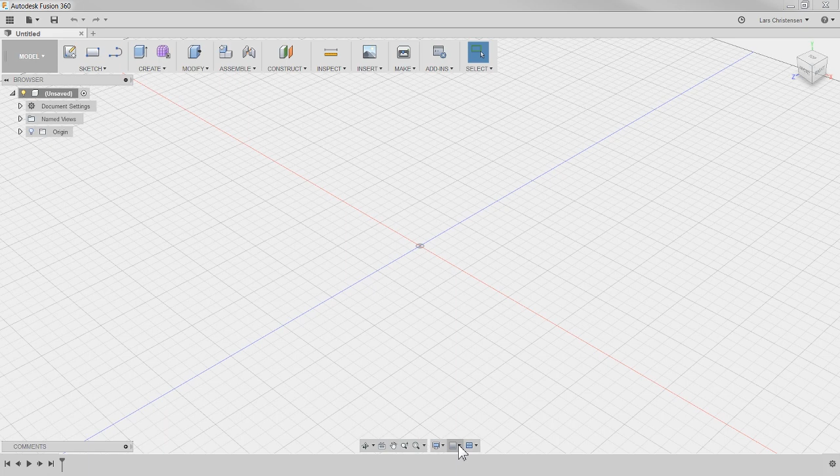And so I changed that. And then down here, you have this grid button. Click on that. I like to turn off layout grid down here. And snap to grid can be kind of nice to turn off too. I think that's one of the things that I normally do.

Mike is asking me where my beer is. Well, Mike, I brought it, and it's Canadian too. So that's good.

All right, so clean slate. Let's start out. So like I said before, whenever you're trying to model something up like this, I normally start with a simple thing, but then break the part into different sections in your mind, or at least this is what helps me. So we got a cylinder part here we're going to model up. Then we got this hexagon shape. You will notice on the side here that it has a little bit of a straight area, I hope you can see that, before it funnels into this. So that's where I'm going to start modeling up here.

Now I took some dimensions with my verniers that I put on a piece of paper. See, this is why I use CAD, because my drawing skills are horrendous. So let's start out with that cylinder, shall we? So I'm going to go up and create a new sketch, and you're gonna select some kind of a plane to do it on. And I'm just gonna select the bottom plane here, and I'm gonna hit C for circle, and open that up there, and we're gonna make that 48 millimeters in diameter. We're gonna do this in metric. So hit enter twice so we get that diameter.

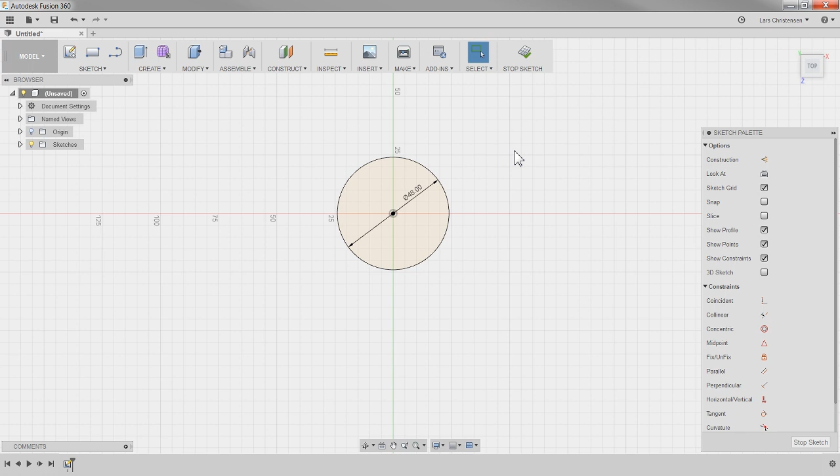So now we're going to extrude that, and I like to hit E for the press pull command. I'm just going to select that diameter, and we're just going to give it a length of 38. The 38 is the distance from the bottom and up till this inner section, that's going to be a radius here.

Now the next thing we've got to do, it seems like logically would be to work from this area up till the hexagon, but what we're going to do is use a loft function between the round cylinder up to the hexagon. So I'm actually going to jump on purpose. I'm going to jump up and start working on the top surface, this hexagon up here. So I measured this width here, and I know that the height here is 78. Now we have right now the 38 up to here.

So what I'm going to do is create, like if we click on the origin up here, we have the origin. I'm just going to rotate the model around, hold down Shift and middle mouse button. We have an origin where we have a plane that we sketched our first sketch on. Now I would like one that is 78 millimeters up here.

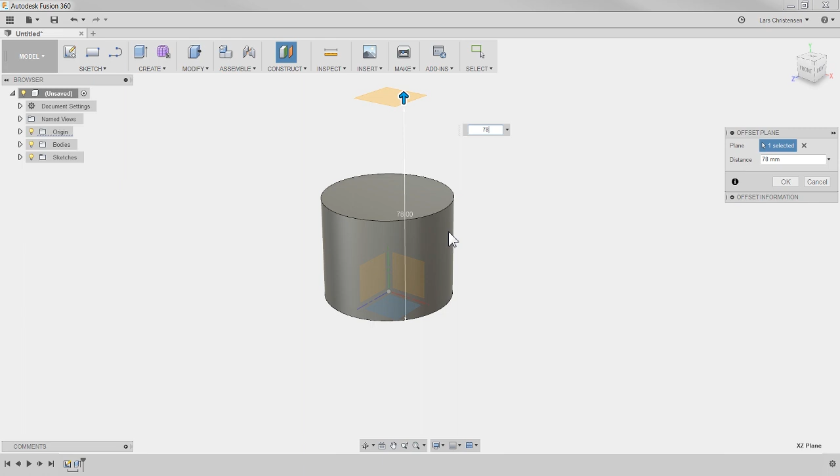So to do that, I am going to say offset plane. I'm going to select that plane, and every time I get an arrow like this, I just like to drag it in the direction I want, and I'm going to make that 78 millimeters up there and hit OK. So I created a new plane for me to sketch on.

So Mike asks a good question. Is it a good practice to start with a new component? Yes, if this was going to become an assembly with multiple parts, then it would be a good idea to start out with this as a new component. So what Mike is talking about is something called rule number 1 that somebody has named. Let me just open up a new design up here. So now we have a blank design.

So rule number 1 says before you do anything in here, you should right click up here and say create new component. Or you could also just click up here, create new component, and then start modeling within that component. The reason for this is to make sure that if you have an assembly with multiple components in it, the history that we are getting down here in the bottom is placed in the right order.

The way I did it here was I did not create a new component because this is not an assembly, this is just one part. But if I suddenly were going to make this into an assembly, the history in here would not go into it if I created any new components.

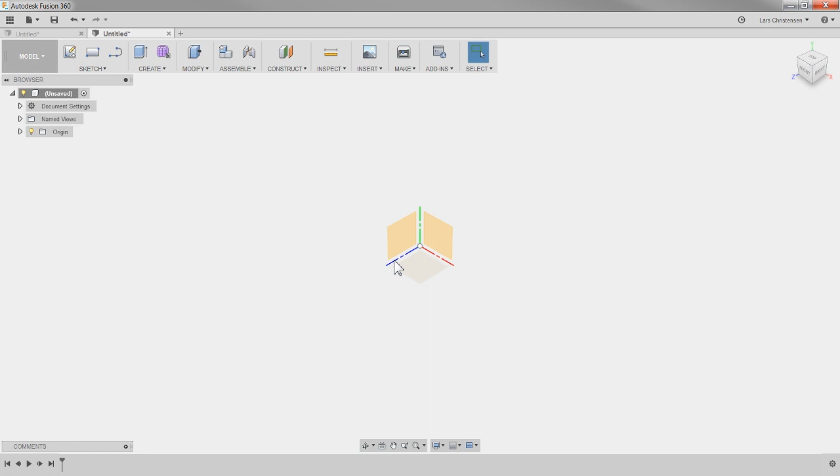But I will normally tell people, don't worry too much about that, because again, there is no rules for that, and you can actually change what is top up here. So if I had designed this on the wrong, not the wrong plane, because there's no rules. Let's just, in a new design here, create a new sketch. On this face, for example, hit C for circle.

And what did I make that one? I made that one 48, right? And then I extruded it out 38. So what we have in this design is the cylinder going this way, and in this design it's going this way if you compare to the top. Now if somebody came to you and was crying that they don't want it like this, they want it like this, first of all, tell them that there is no rules, okay?

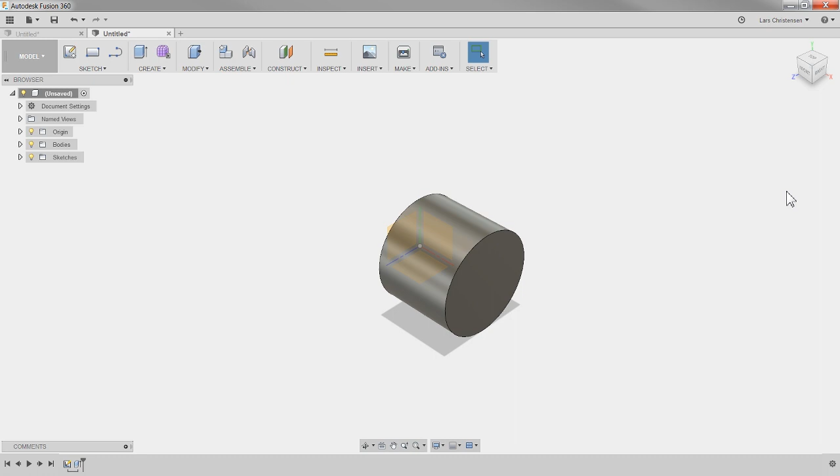But secondly, you can go over here and click on the right view, and it will make it normal to that right view. Then you can right click right here, and you can say set current view as top. So right now it's the right. You can kind of see that's the right. If I right click and I say set current view to top, notice what happens. Now it's the top. So I just flipped it around.

So now it is the same as the original design right here. So I hope that answers your question, Mike. And all we did up here was just change the camera angle. We didn't move the model around. Just think about like you're looking at your model with a video camera, and you just changed the perspective. So I hope that made sense.

All right, so what else have we got? We got Darren here. Good to see you, Darren.

So Matt asks, if I primarily design things to cut on a plasma table, should I do my design in sheet metal versus in model? That's a good question, Matt. Cheers on that. I think that, and this is just my personal opinion, if you don't have to flatten anything, if you're cutting parts on your plasma table that don't need any folding, then I would not go into sheet metal at all.

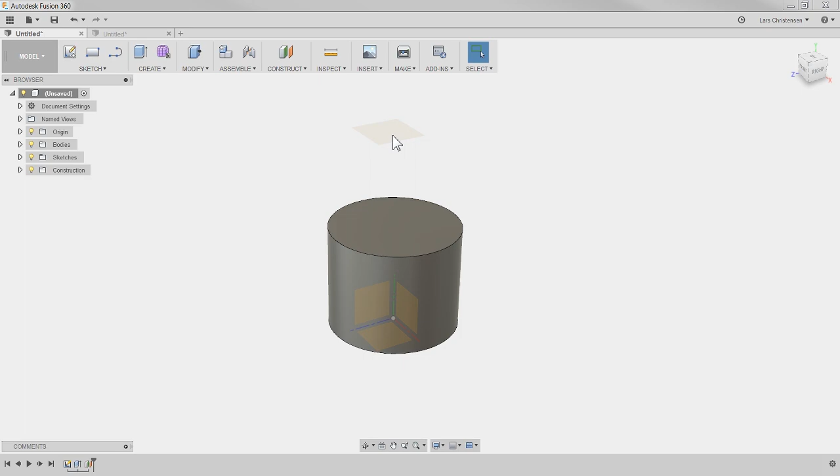So we are modeling this up now, and now we're ready to, so I made it 78 millimeters from here to here. This plane is here. So we're going to start sketching this hexagon up on this top level here. Now, in olden days, well, we got to open a sketch on it, no matter what. You might have had a tendency to start drawing with lines, kind of like the hexagon up here. You can do whatever floats your boat to make that hexagon like this, that's not pretty, then you could start using all the constraints over here, dimensions and all that stuff to actually make it a polygon or hexagon or whatever you want to call it.

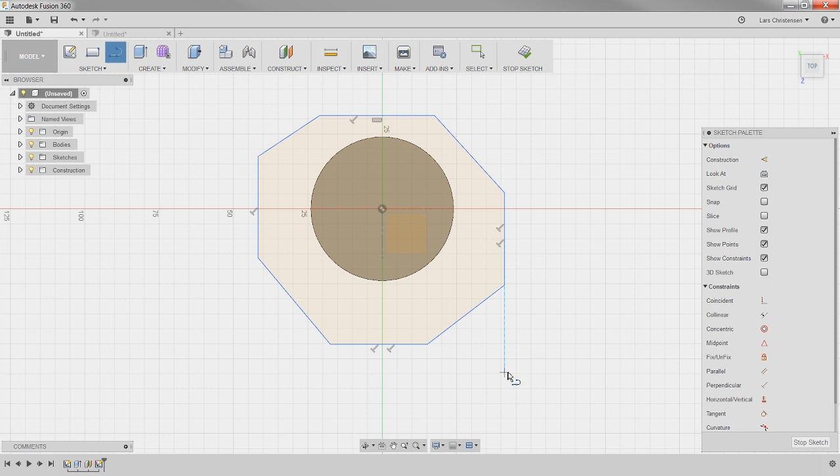I'm going to do Control Z. That is undo, Control Z. You can actually also hit right up here, undo, and you will undo back. And by the way, here's a really neat function. If you click on that little arrow next to it, look at how you can see the previous commands that you can undo back. And then you can, of course, also go forward.

So now, over here in the sketch drop-down, there is a Polygon tool that will do exactly what I was just trying to do. And that brings me up to, if you're new to Fusion, we get so eager to try to put something on the screen quick, and many times you miss how some of these tools work. And the reason I'm saying that is this Polygon, I used to use SolidWorks, and one time I had to do a polygon. I drew it up line by line, and somebody was like, why didn't you just use the Polygon tool? And I never knew that was hiding in there. So slowing down a little bit when you're working and maybe just exploring some of the different tools in here can really, really help you out. So not a $500 mistake, but it maybe looks a little silly.

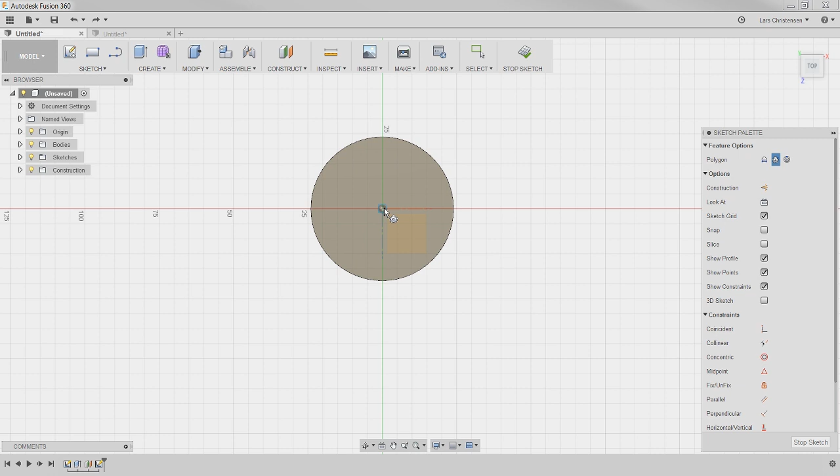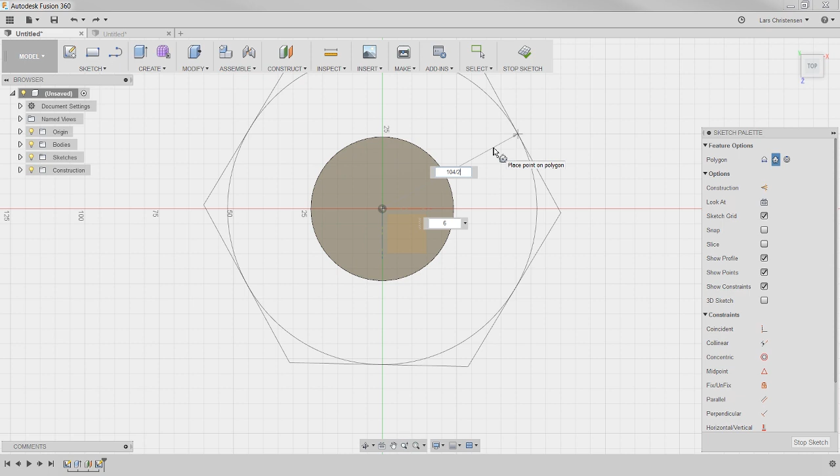Be aware that in here, in these dialog boxes, you see the 242.488, you can actually do math. So if I type in 104 and then divide it by 2, it will actually give me the right size. So I'm just going to hit enter here. So now 52, you probably could have done that math.

Now this one is blue. The $500 mistake that Mike is talking about is that we always need to fully define our sketches, and they need to turn black. So the easiest way, whenever you're looking at a sketch like this and you're thinking, why is it blue? Why is it not black? The easiest thing is to move your cursor over a corner, hold down your left mouse button and drag your mouse, and it will show you. So this shows me that I can't move it away from the center where I clicked the 52, but it will spin around. So I gotta work on that.

Now, one thing I could use is these constraints over here. I'm going to take this line here and make it horizontal. Click here, and you will see that now it gets this horizontal symbol. It is now fully defined in black. Now, just to show you what I just did, I'm going to rotate the view a little bit. I'm going to hold down Shift, middle mouse button, and move my mouse. So now you can see that hexagon or polygon, whatever you want to call it, sitting up here on the 78 millimeter plane.

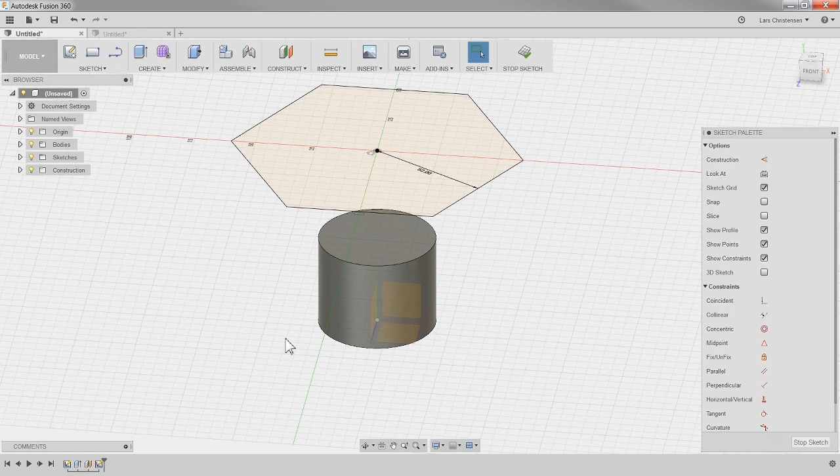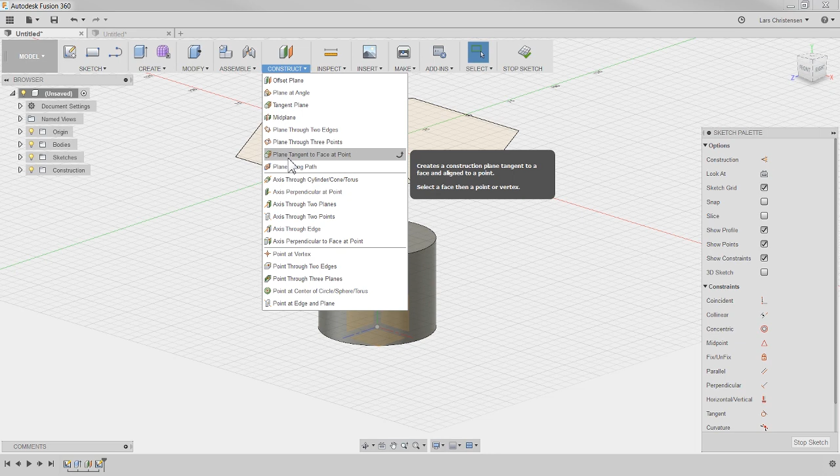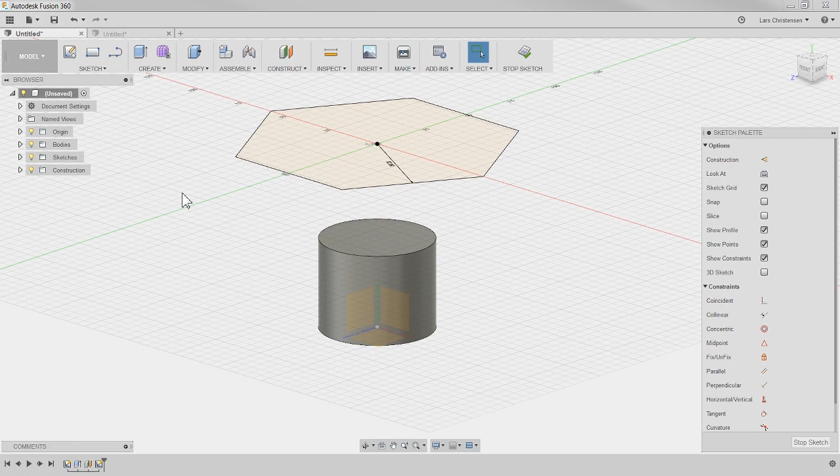And this is not uncommon when you're working inside of Fusion, that you will create a new plane, an offset plane, to sketch something else on. And now we're going to work our way down to connect the two. So I hope that makes sense. Like I said earlier, remember, you can only sketch on either a face or a plane. So if you don't have a face to sketch on, many times creating a plane, and you have all different kinds of options in here, will help you create somewhere you can sketch. That has happened to all of us, where you're getting stuck and you're not quite sure how to proceed. Many times it's just because you don't have the right plane. I have made a couple of videos using these different planes, so if you're looking for some feedback on that, let me know.

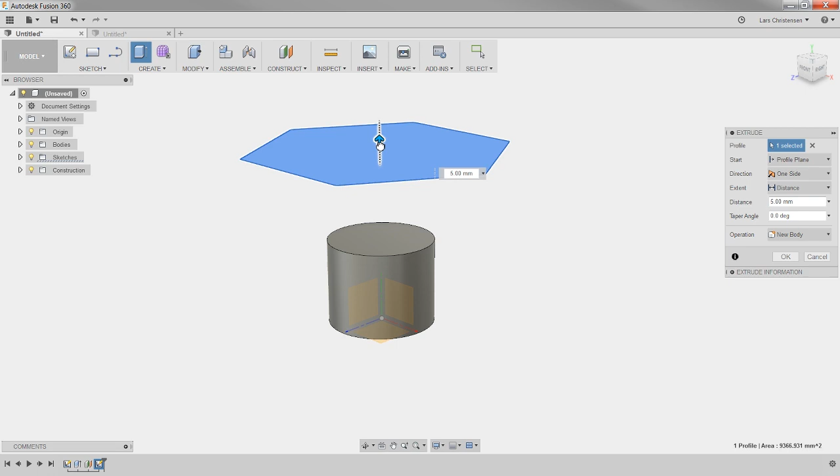Okay, so now we're ready to extrude this one. So we have created that sketch. Now I know that there's all kinds of radiuses and fillets on here. We're gonna work on those in a little bit. But I'm only gonna extrude this one out 10 millimeters, that little straight portion right there. So I'm gonna go over here and hit E, and then we can go either this way or this way. And this is why I like to drag, because as soon as I drag it down here, you will see that it shows we are minus. If I just typed in 10, it's actually going the wrong way. It's supposed to be minus 10 this way. And I'm just gonna hit OK.

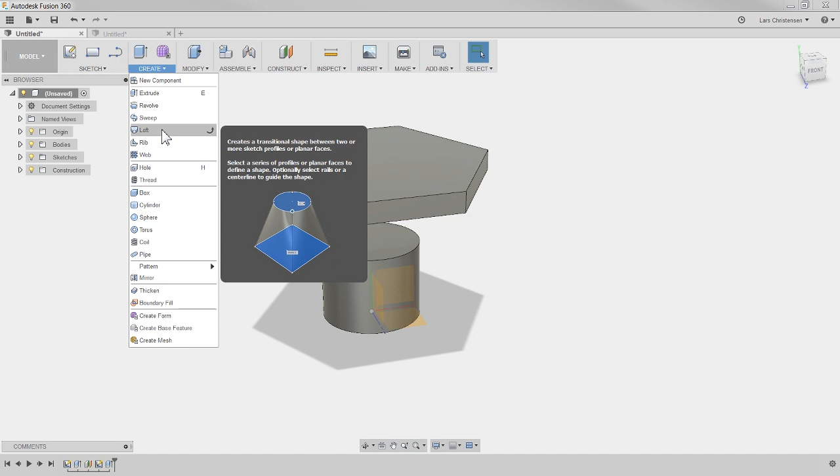Now something interesting has happened, and that is we've actually created what is called a multi-body by having two bodies in here. Some people would tell you that you are now working in an advanced environment. So we got this here. Now we have to make that transition between this face, from the polygon to that round face. And for that, we're going to use a command called a loft. Now, if you've ever seen me use the loft, I have always used two sketches, one in one end and one in the other end. But you actually don't need any sketches. It will also work between just faces, which is pretty awesome.

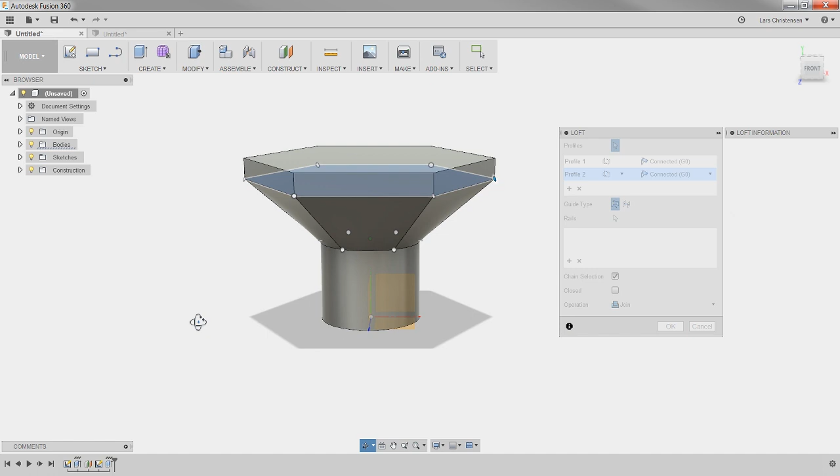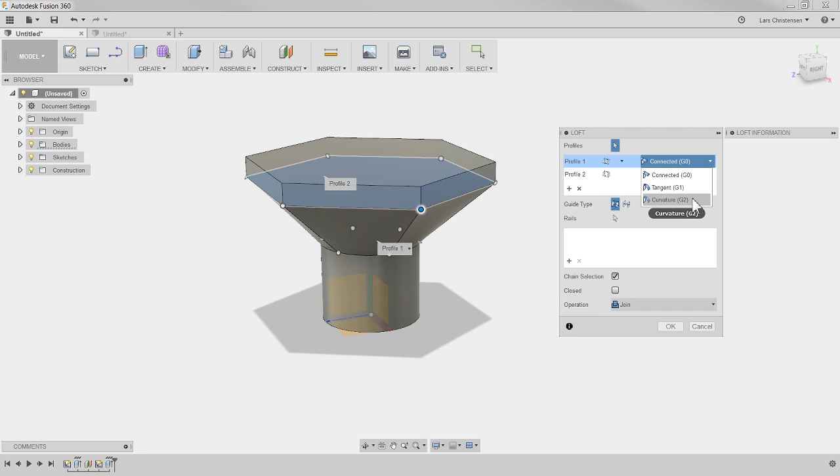So if I select our bottom face here, hold down Shift middle mouse button to scroll around and select this other face here, you will see that we get a nice transition between the round and the hexagon. Now you will see that it creates a point at each hexagon corner because it has to break down the geometry. Now be aware that there are a lot of great options over here that you can work with. I've made a live stream about this too, there's something called G0, G1, G2. It really means how it interacts. So let me go tangent, and you will see how we suddenly get a tangency between this cylinder and this cylinder. So just be aware there are some things you can tweak in here. But we're going to leave it straight out of the box. Click the two faces, leave it at G0 and hit OK.

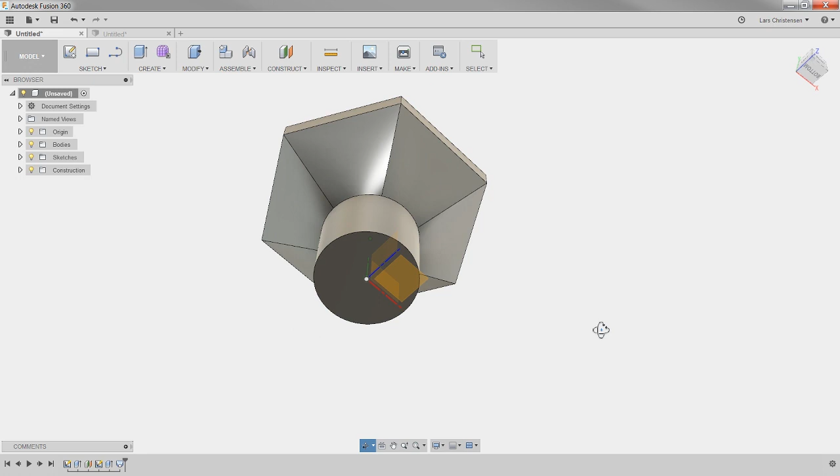And something that for many people seems a little like, how the heck would I ever do that?

But the Loft command in here is really, really nice. Last Wednesday, we talked about the Revolve command to make the screwdriver. So that was another one of these tools that does some magic. Okay, so we kind of got this created here. Now, I might be ready to concentrate a little bit on cutting out the material in the center.

So this is actually, I think, a pretty good tip if you're brand new to Fusion or to CAD in general: start out making all your solids, and then you can come back and do all your cutouts. Like we're gonna cut out the center of this one, and then in the end you could put all your fillets. However, I'm gonna show you a trick about that in a second. Okay, so

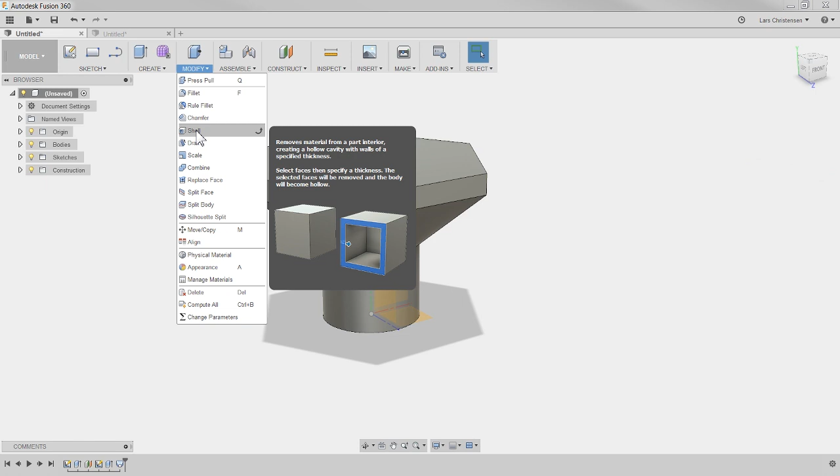now where we got to make a hole through this one, I'm going to introduce you to another command that is really nice. So you're getting two cool commands tonight, and that is the shell command right here. What the shell command does is that if you select a face, it will hollow everything out to a specific thickness. Let me show you. So if I click on shell and I click on this top face, it asks you for a thickness. I know I want this one 3 millimeters, so I'm going to type that in.

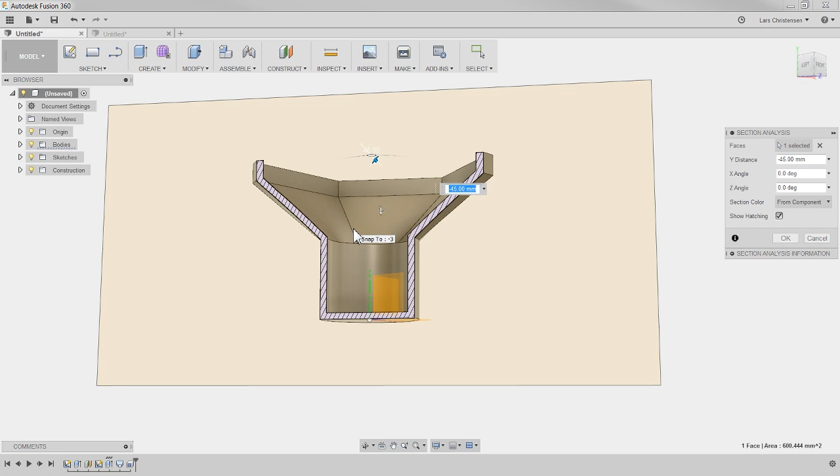And notice, shift middle mouse button, how it literally cut everything out and made a wall all the way through here that is 3 millimeters. Let me just hit OK for a second. I go up here to inspect a section analysis so you can see it a little bit better. If I cut through here, you will see that it creates a 3 millimeter thickness all the way around, and almost does what I want, because I actually also want the bottom to be gone.

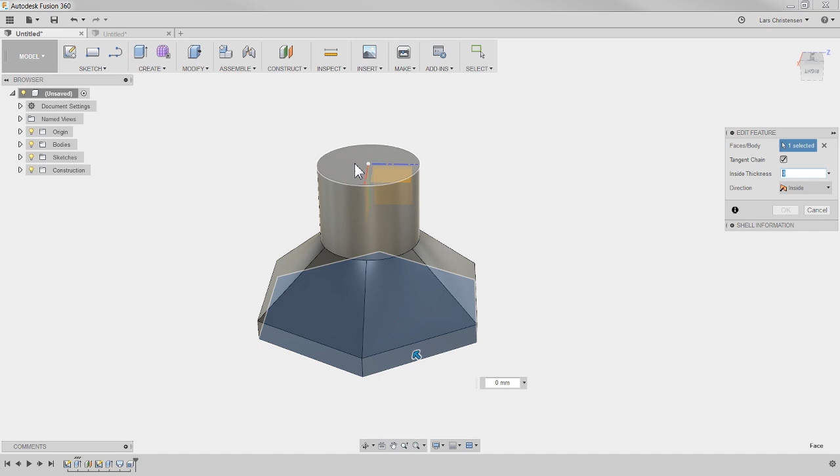So one of the things that is interesting about the shell command is that if you select two faces, they will both be changed. However, you cannot select the second face if you already have put in a dimension in here. If you already have a thickness in there, it won't take it, because the calculation will already happen. So turn it back to 0, click on that second face, and now I can make it 3 millimeters again. That's one of these small tricks that, how the heck would you know it?

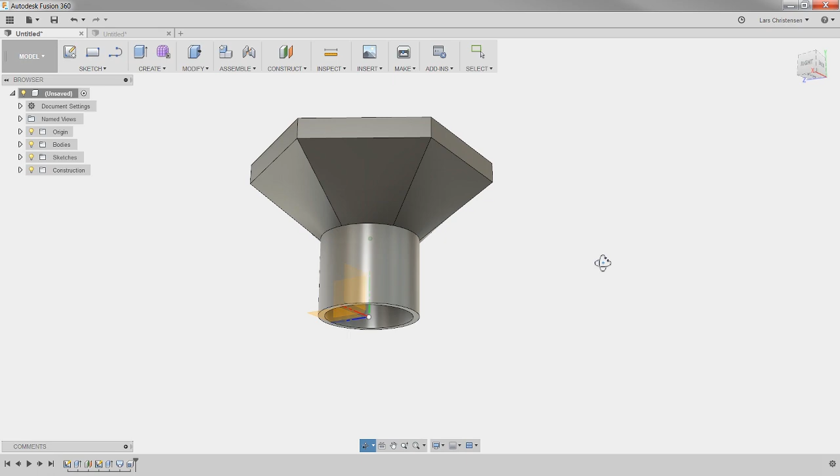But now, selecting the two faces, the top and the bottom, and then putting the thickness, we just made a cool cutout for this. Pretty cool. We're pretty close to being done with this one. So cheers on that.

Now, the next thing when we're looking at our funnel here is there's no sharp corners in this one. It's very smooth, and that has all been done with fillets. This part has different sizes of fillets on it. I haven't tried to measure them, I'm just going to wing it. But what we can do here is add fillets. The fillet command is sitting right up here in Modify, called fillet, or you could also hit the F key on your keyboard.

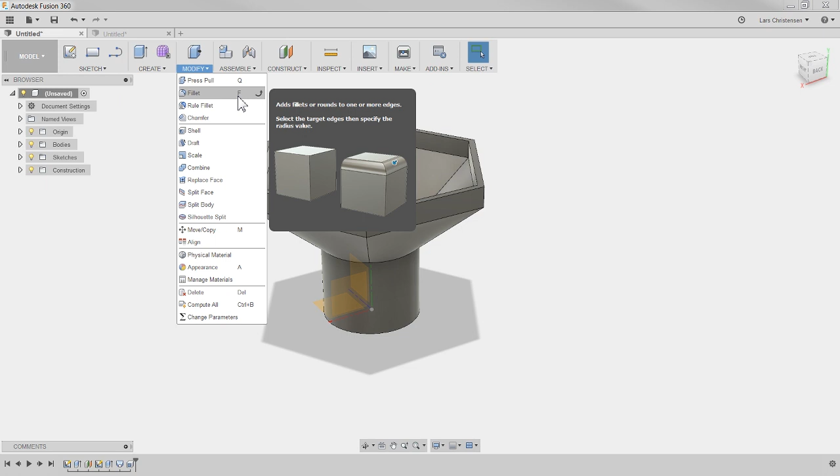All right, Mike says mind blown. Pretty cool, right? A few steps, and we created that funnel. Now let's add some fillets to it.

So I'm going to select fillet, and just for the matter of showing you something, I'm going to go ahead and select all these different lines. I'm just going to hold shift, middle mouse button. I'm going to select all these lines right here, and there's different ways we could select these, but I just want to show you going around here, selecting these edges, and then we're going to give them one size fillet, like this one, and this one.

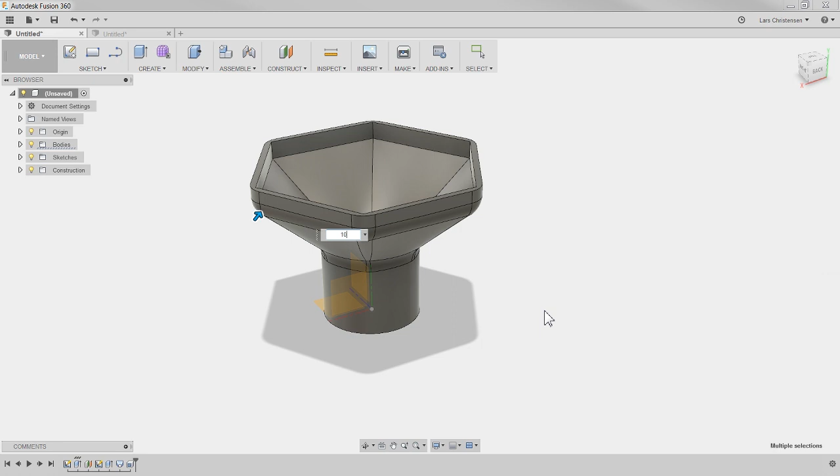So I selected everything there in light blue going around it, and I'm going to give it, I don't know, this is where we could start playing around a little bit. So maybe we give it a 10 and see how that looks. That might look pretty good. I'm going to hit enter. So here you can now see that we get some fillet. Now something happened right there, so that was not too good.

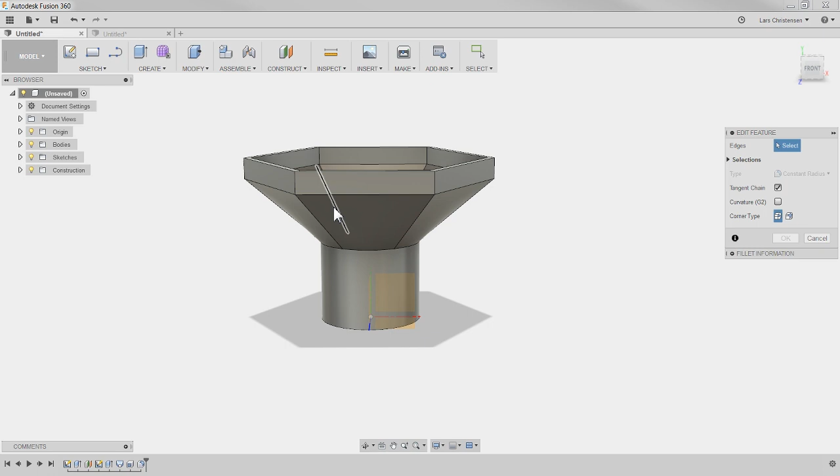Let me go back in and edit that feature. Did I select something different? Huh. I didn't think I did. Whoops. Or maybe I did. Select these here. I just gotta see if this was something that I did wrong. Oh, see how I don't want it right here? So I'm thinking that maybe 10 is too big.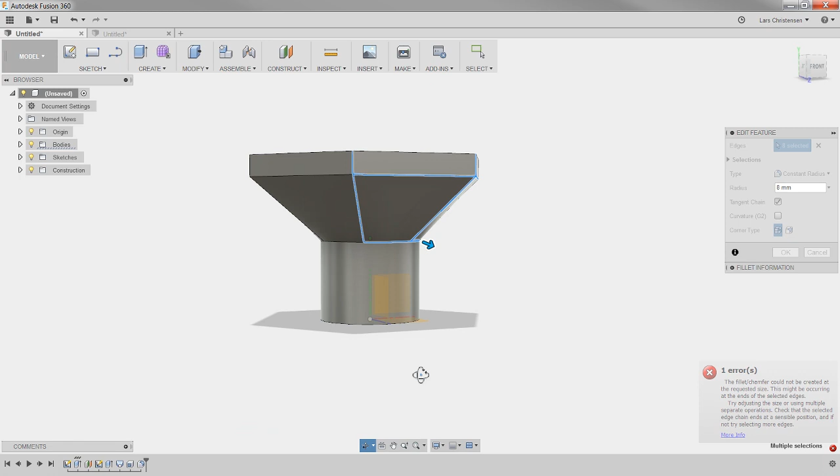Okay. So this is the wonderful thing with live streams, right? So let me just try. I'm not gonna quit on this. I'm not a quitter. Let's just see here if I'm missing something.

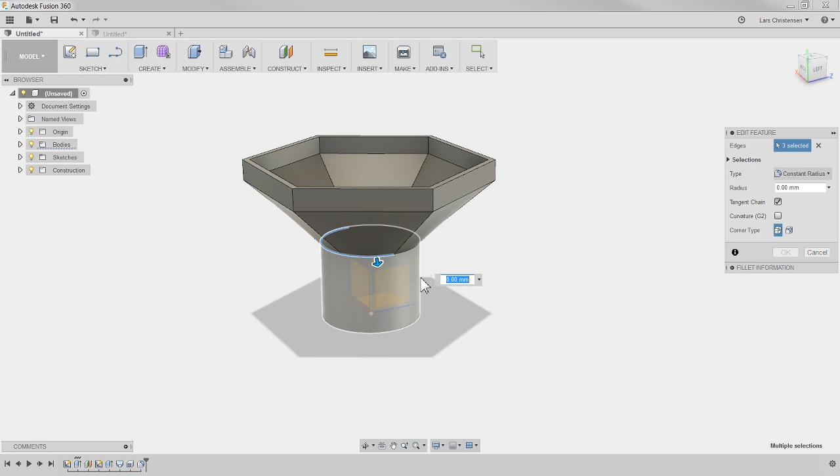Select all these. Yeah, see, it does generate. All right, so that's interesting that it does that there. Now, if it does something like that for you, what I would recommend you're doing is actually going in and maybe start bringing the fillet down into sections. Because fillets, you know, when I used to work on the shop floor, we would always just be like, just put a fillet on that, right?

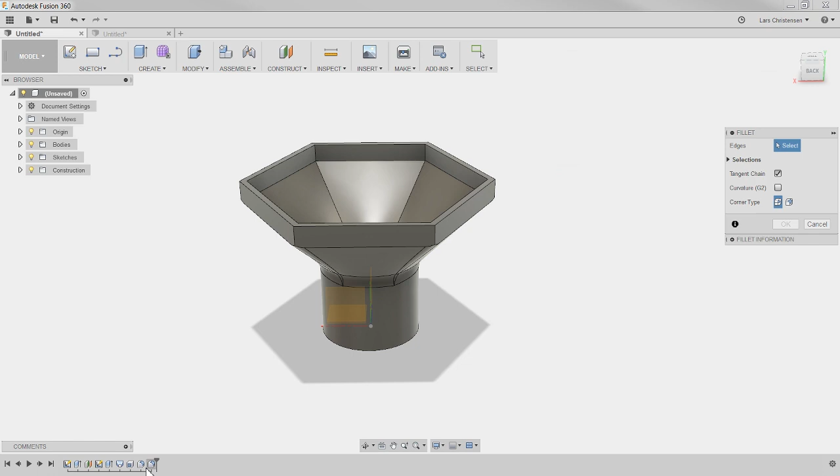But the truth is that in the real world, there's a lot of calculations going on in here that could mess with that. So let's just try to go in and break the fillet up, and instead of applying it on everything, I'm just going to break it into a couple of different features here. This is just to show you that I sometimes am having some interesting things. Right now it looks uniform, so it looks like it's working. So I'm just going to go in and do another fillet. Now you'll see that I'm now getting extra options down here.

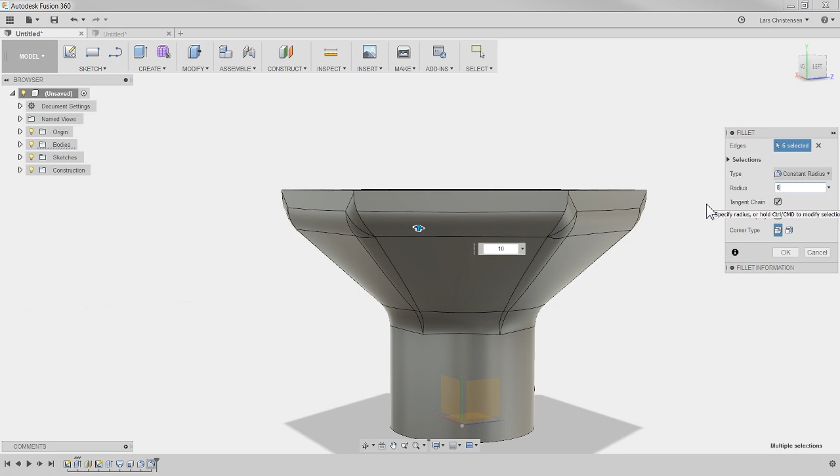So, let's see. Let's see if we can do this. Maybe I didn't select it. I don't know. That looks like that becomes big. There's definitely some interesting development happening when we do it right there, huh? I'm not sure I like how that looks. That's an interesting development. That looks a little bit better.

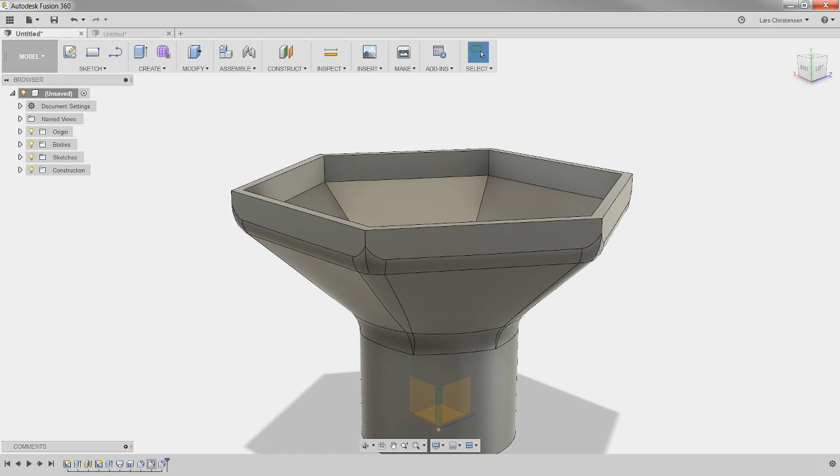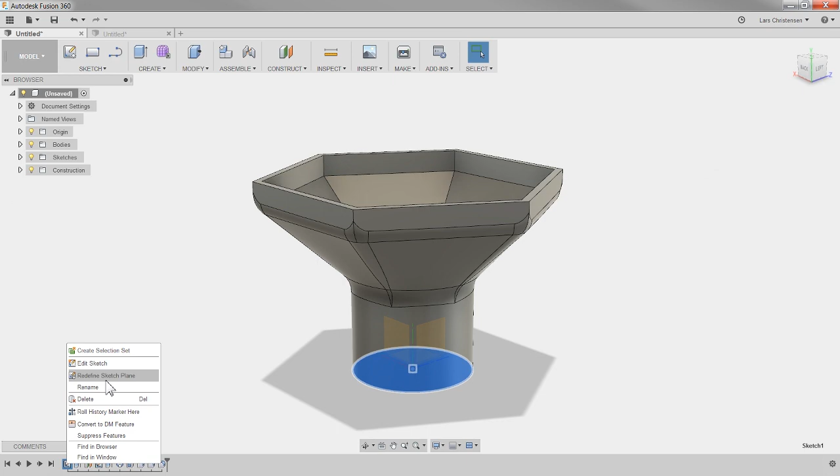Do you have a video that covers resizing things after you have sketched them up? For example, if I use either 4 lines to make a square or use a 2-point rectangle and realize I used the wrong dimensions and need to adjust them. Well, you can go back into the sketch itself and adjust it, right? So right now we have this whole thing modeled up here. If I suddenly realize that this diameter down here was going to be smaller, I would just have to go back down here in the history, right click on a sketch that is controlling that, and hit edit, and it will bring me back to that point in the history tree with the 48.

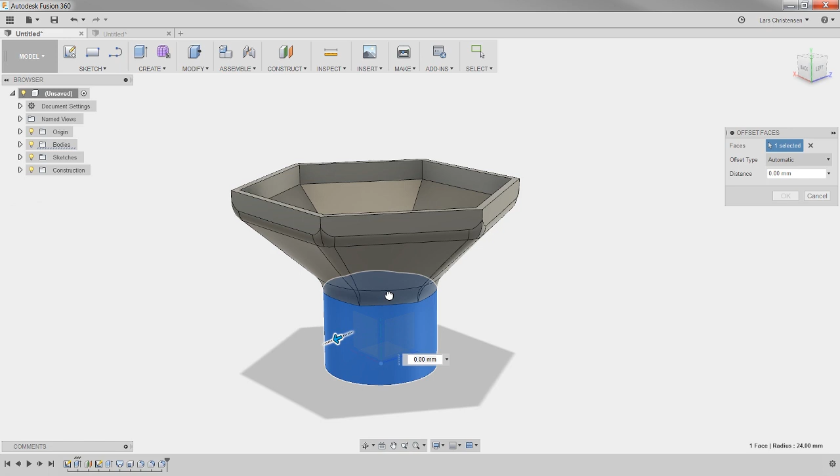The other thing, there's different options in Fusion depending on what you're doing, Jordan, that you can use. Again, this is a little advanced maybe, you could hit Q, and when you select this face, it actually becomes an offset face. And I could actually now manipulate it, make it bigger or smaller. These fillets might cause some issues, but that's another option in there. Actually, I think I just, yep. So yeah, there's a couple of different ways to do that. I hope that makes sense. All right, so I just wanted to show something here with all my fillets.

Talking about this history tree, it's actually good you brought it up, Jordan. I think this is one of the things that is important to know how things kind of work, because down here we can left mouse click and drag this timeline back. You can hit the arrows down here, you can click through. So we created the first sketch. We extruded that up. We created an offset plane. There's that offset plane, 78 up if you just joined us. Whoops, now I hit the wrong button.

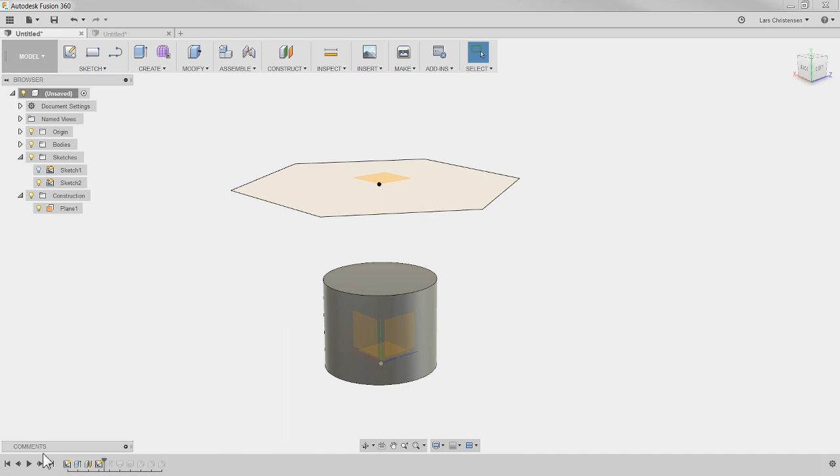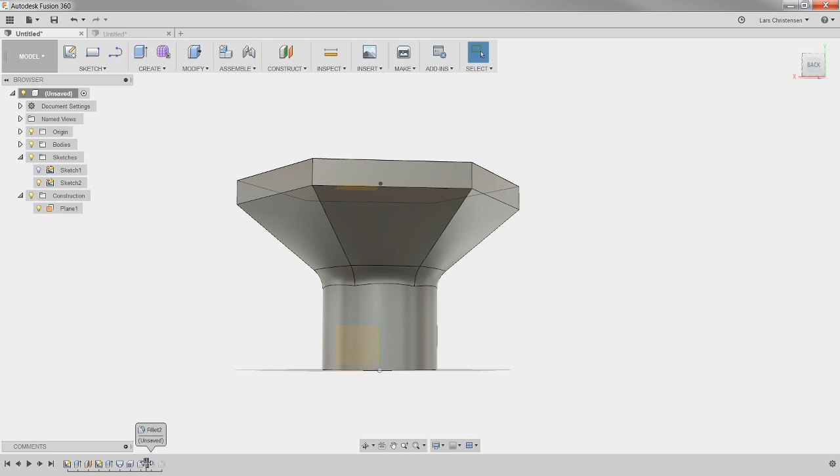We sketched a hexagon polygon up on that area. And then we extruded that to 10 millimeters down towards the round one. Then we used the cool lofting function to combine the two without using any sketches, just the faces. And then with the cool option of selecting the top face and the bottom face, we shelled that whole thing out. And now I ended up bringing this down into 3 different fillets to add some nice radiuses to the part here. We got a couple of questions. Let me just show you something cool here.

So whatever happens down in that history tree happens in order. And not all CAD software works like this. So everything is exactly the way that you build it in that history tree. And that can be a really great power to know you have.

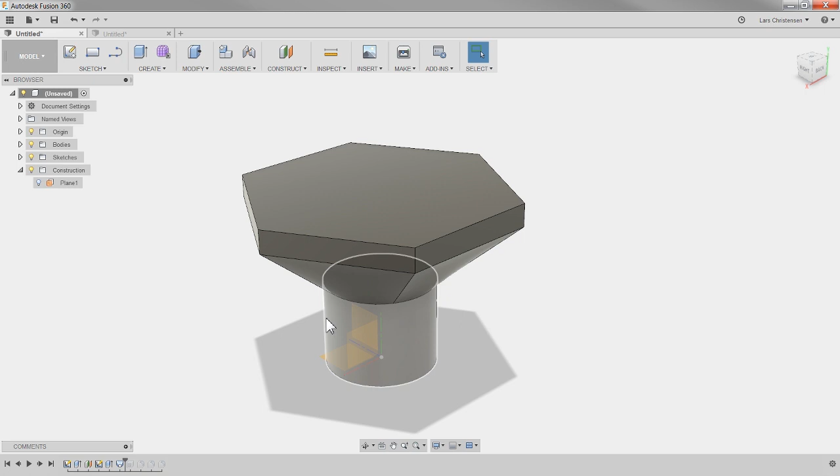Because if we go back and we look at this, let's bring it to this stage, right? We had our loft, we had our 3 components, everything looked great. Then I shelled it out, right? Everybody's with me? Now, I actually also wanted to add fillets to the inside of this. It's not just the outside that gets fillets, but so far I've only added outside fillets to it.

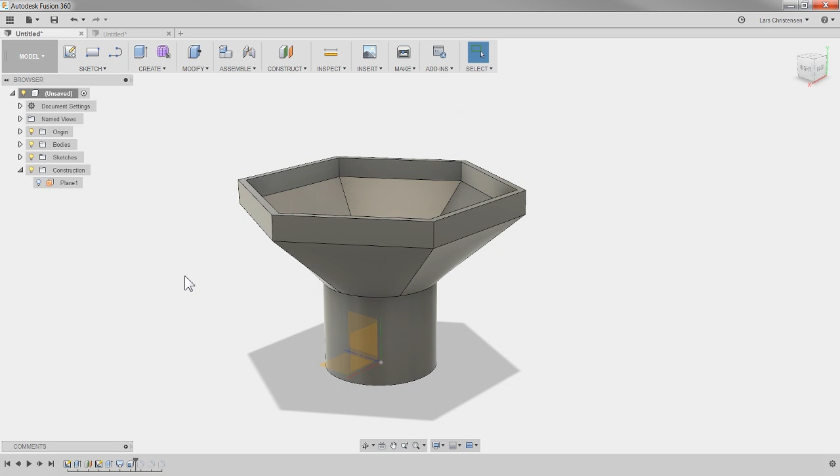Well, the shell command, the way it works, I've already said it 8 times now. Sorry, I repeat myself. We selected the top and the bottom, but what the software really does is it looks at the outside shape to be able to create the inside shape. When you're using the shell command, it's looking at what is on the outside to try to bring it inside. So now, where we added all these fillets, what would happen if we dragged the shell command in front of the fillets?

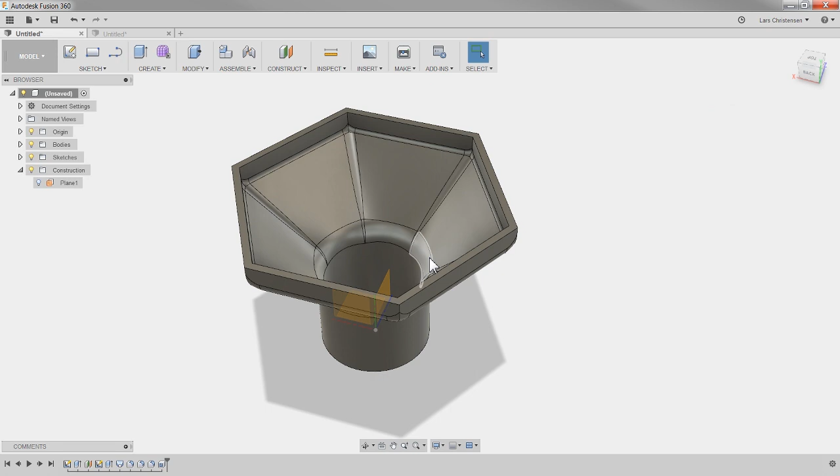See what just happened? I brought the shell command from before the fillets to after the fillets, and it took all those fillets we put on the outside and, just like that, put them on the inside. So let me just repeat that. The way we built it up before was this. I did my shell, everything was good. Then you watched me struggle, picking all these outside edges to put fillets on it.

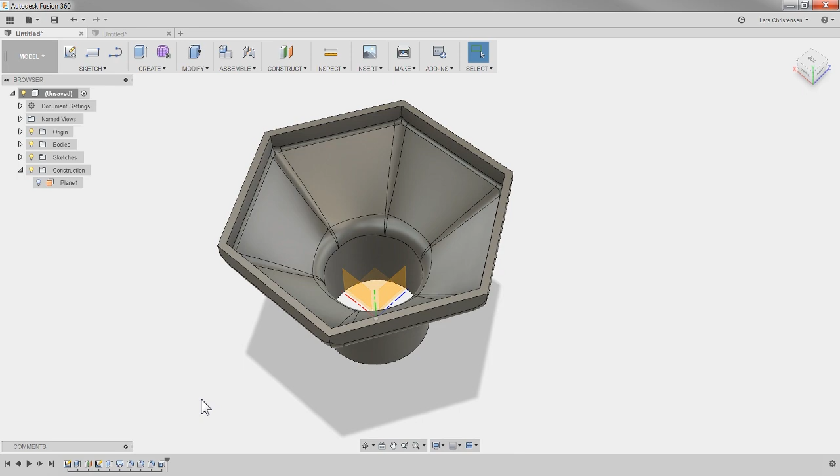Well, my next step would maybe be to do the inside, but if I drag the shell command ahead of the fillets, then the shell command will look at the outside and mimic that on the inside. So that is one way that you can kind of cheat the system a little bit, and you can create something like this.

All right, I think I maybe just missed a couple of questions here. So let me just see if I can scroll back. I don't know if I can scroll back. Oh, yes, I can. Good. Have a sip of my Canadian beer. All right.

Stefan, well, I'm sorry about your back, man. I'm glad you're here, but I'm sorry about your back. David, I'm looking forward to you sending me your funnel. All right, William, I'm amazed at how simple and clearly explained. Oh, appreciate it, man. Thank you so much. That means the world to me.

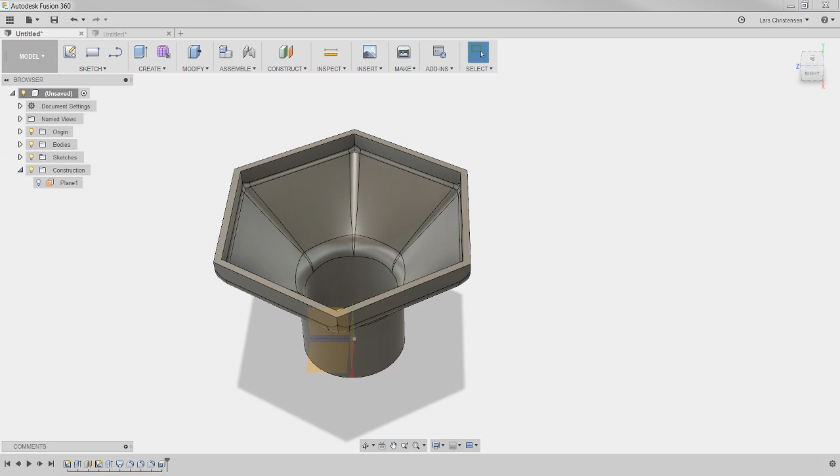Jordan, I've tried editing the sketch with limited success. Yeah, you know what, Jordan, Mike was referring earlier to my $500 mistake in the live stream. And that was why. I had a really hard time when I started with CAD figuring out sketching something up and then extruding it into a 3D shape. I got that, but the whole sketch environment was really confusing to me. And I decided that turning your sketches from blue to black by fully constraining them was a waste of my time.

I had stuff to do. I didn't have time for that kind of stuff. And that ended up being the famous $500 mistake that I made. So I think it's definitely the hardest thing to get over when you start working with Fusion, this sketching thing. And sadly enough, it's the first thing you've got to deal with. But keep on going on it. Keep on trying. If you have any questions, you should know where to reach me. Okay.

All right. Do you have a video on panning and zooming? You do it so much smoother than I do. Matt, actually, I do have one on panning and zooming. You can send me an email and I'll send you how I do it. And I think Stefan said you can do that with these 3D mice. Actually, today, I am just spinning around with shift middle mouse button, the same thing as you. I try to do that on Wednesday evenings. It's a bit more fun when I've had a beer.

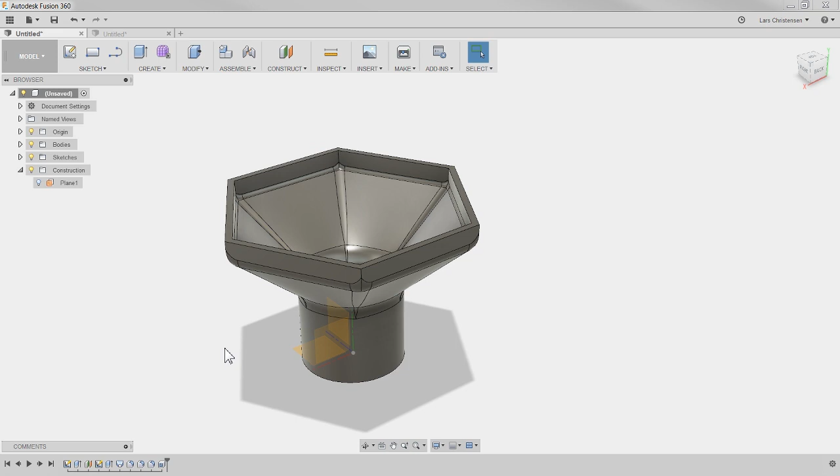So a couple of more things. Oh, so one other thing I want to do to this model here is I want to put a fillet on the top here and on the bottom. That's actually where we had that 3mm thickness. So just go up, hit fillet, and if you select the outer edges like this, and half of 3mm is 1.5. Fusion actually does a pretty good...

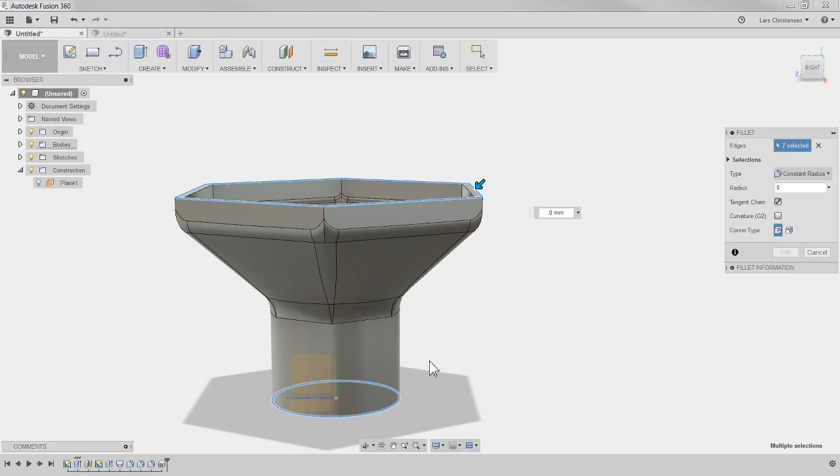Oh, I want to select the inside too. See, now you can't select it because you got a dimension in there. Well, what if you select 3? You actually get a nice fillet there. Let's do it to 0, and then go up here and just select the inside of it, and I want to select this too, just to kind of finish that off there. Okay, so 1.5, and that gives you a really nice full fillet.

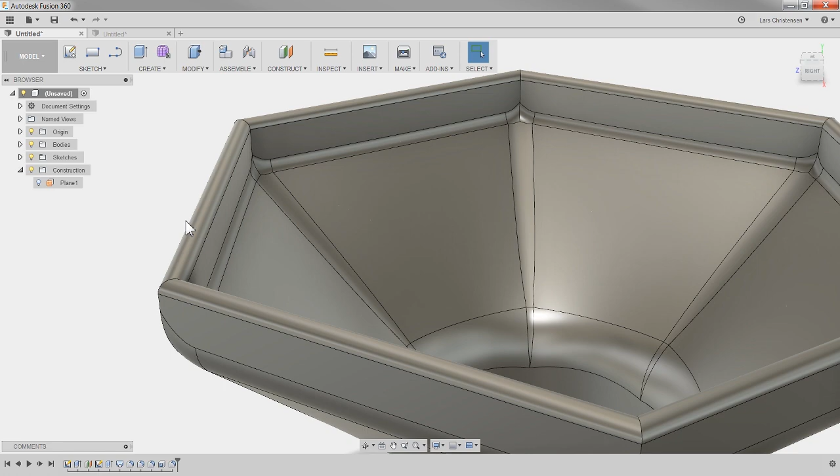Some other CAD systems that I work with could not handle this. They can't. Many times CAD systems, this is an important thing just for you to know for your reference. Let's just turn the origin off. For your reference, know that CAD systems in general don't like zeros. So if like two lines meet at an intersection or something like that, the CAD system has a terrible way to handle it. But I think this is pretty good.

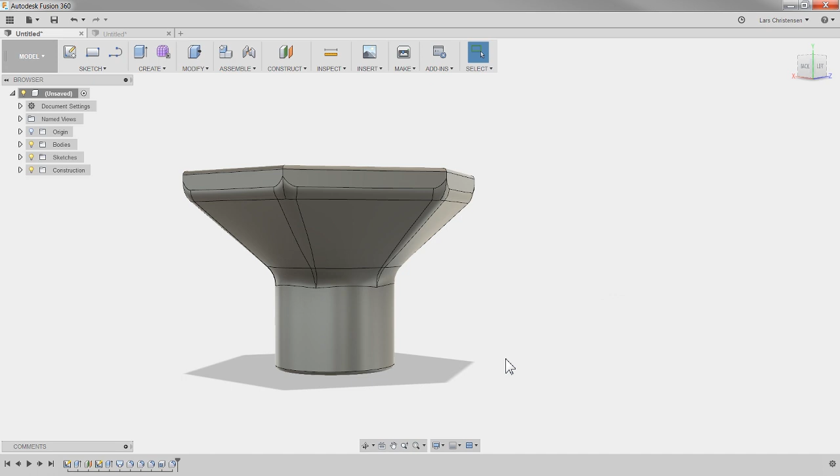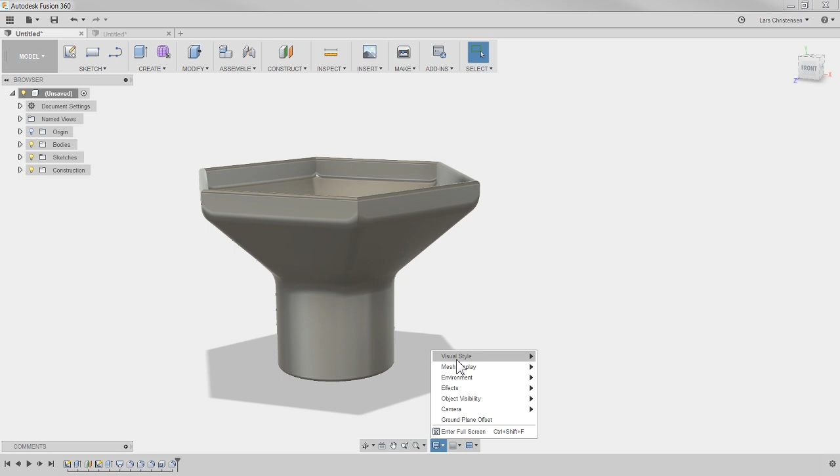Now, I know that these lines stand out. I could actually also put a full round on here. I know that these lines stand out a lot, but remember that when we're working inside of Fusion, we're normally with hidden lines shown. You can do that down in display. If you go to Visual Style, normally we have shaded with visible edges on. Normally, if you're looking in real life, you would actually see it as shaded. So that will be a little bit more realistic. I do always model with shaded with visible edges. You just got to remember that it looks, I would say, worse or whatever it is.

Now, what else? So, if you have one of these AeroPress funnels, you will see, a little bit closer, that there are 3 tabs on this. I don't want to leave those out. Now, to model those, we're going to do something pretty neat here. We're actually going to go back into what we already kind of used. Shift, middle mouse button, we can rotate it around here. The thing is that these, as you can see, start up here somewhere, I don't know, 20 millimeters up or something. And then they go up till this surface up here. And they have some good radiuses on it too. There's 3 of them. So let's start modeling one of them.

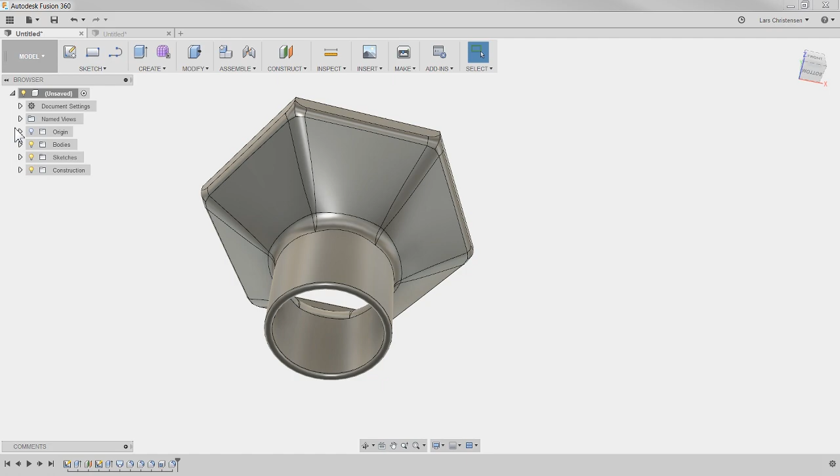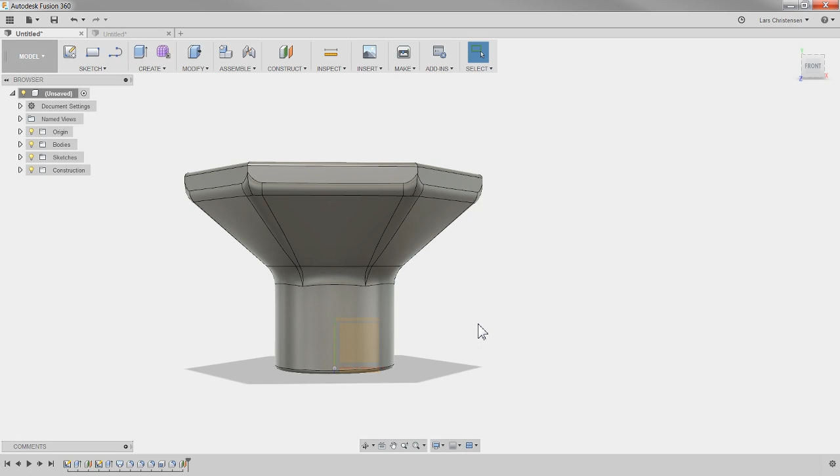Now, I'm going to use another offset plane. I hope this is not right in your face. So I'm going to take that plane we have down here, and I'm going to offset it up so I can start sketching up there. So I can turn my origin back on, right over here on the light bulb. Shift middle mouse button, rotate it around a little bit. And I'm going to do an offset plane. I'm going to select that bottom plane down there. And if you drag the arrow, you can kind of see that. We're going to make it 20 millimeters. Hit OK. So now I have another construction plane sitting right in there.

So I'm going to start a sketch on that. I'm going to say create sketch. So I'm not selecting the bottom. I'm selecting that one that is 20 millimeters inside of the part. And you will see in a second what I'm doing.

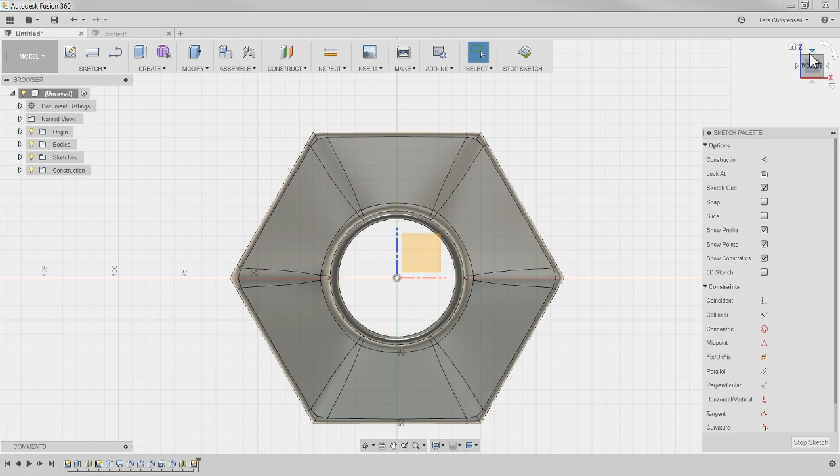Now, looking at my part here, I notice that this tab is in line with this. But if you look inside of Fusion, you will see that right now up is kind of here. Now I could start sketching it over here sideways, but in my vision I want to make it up here. You can actually go up here, and there's some arrows on the view cube. If I click on this arrow right here, you can actually rotate it around. So if you didn't know that, that might be a pretty good tip. Okay, so let's start sketching a little bit of a rectangle that goes up here.

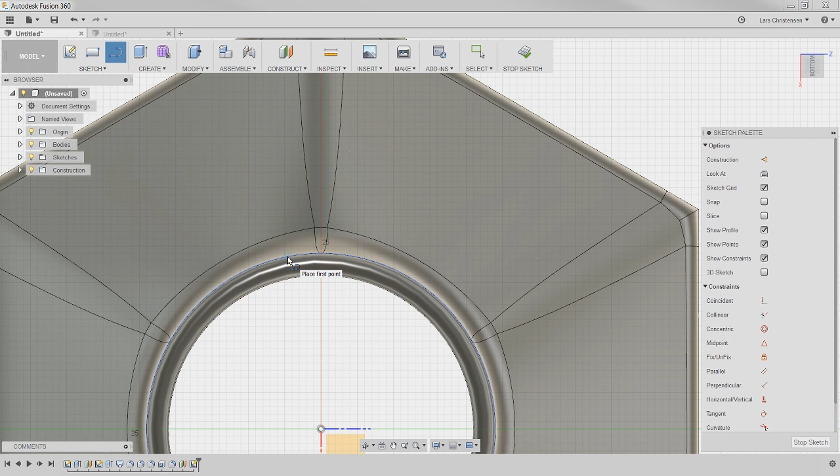So you could either use the 2-point rectangle, but I'm actually just going to do a couple of lines. I'm going to click here, and as I'm going in here, I'm actually going to snap to this, the diameter we have, and I'm just going to sketch a line that goes up, over, and down to about where I want it. Now, I did this on purpose. Hit escape to get out of the line command.

You will see that we got a vertical here, but I didn't get one here, which means that if I move this around, you can see that this is not great. So I'm going to fix that first, hitting the constraint over here, select this line, and that becomes straight. Now, of course, you notice that dang thing is not centered. So I'm going to show you one of my favorite commands.

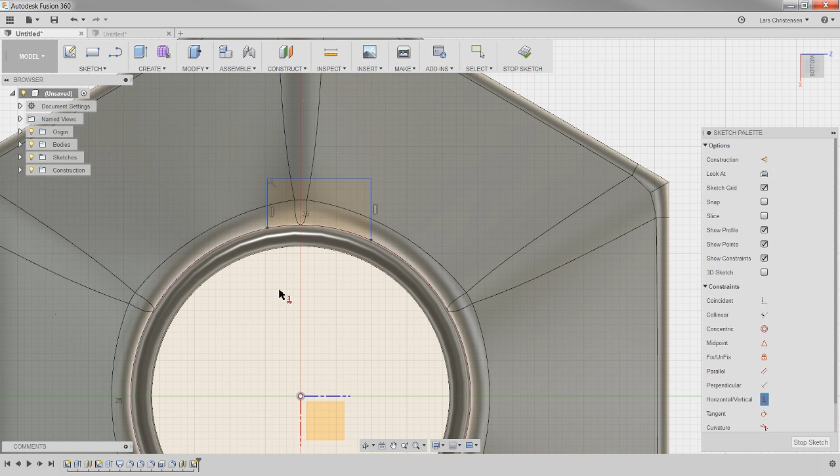So I'm going to go up and create another line. I'm going to draw a straight line up here, place that line, and hit the little green check mark to finish the line. So we have a line right here. One of my favorite constraints over here is down at the bottom. It's called symmetry. The way it works is select one point, another point, and then a vertical line, and bam, now these two are symmetrical.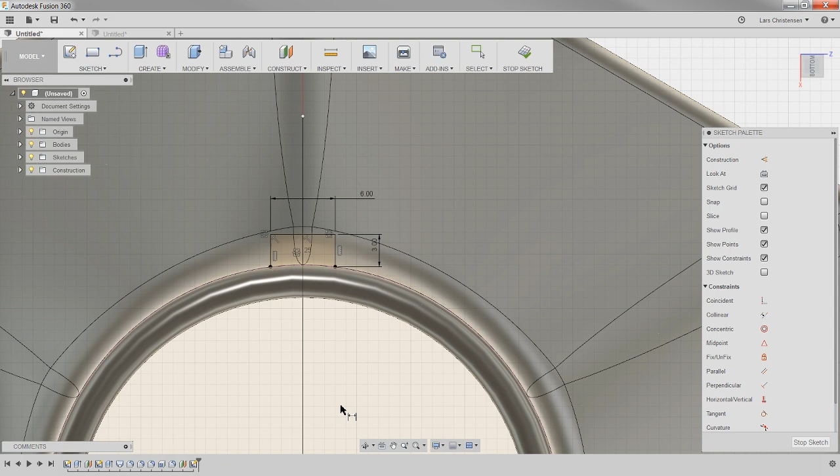Okay, so now I can just add the dimensions I want. So D on the keyboard for dimensions. 6 maybe. And how tall are we gonna make it? I'm just making this up right now. Actually, let's make it 3 so it goes down to this area here. So let me just shift middle mouse button to rotate around, and notice that we are sketching here on that 20 millimeter area. So I hope that makes sense.

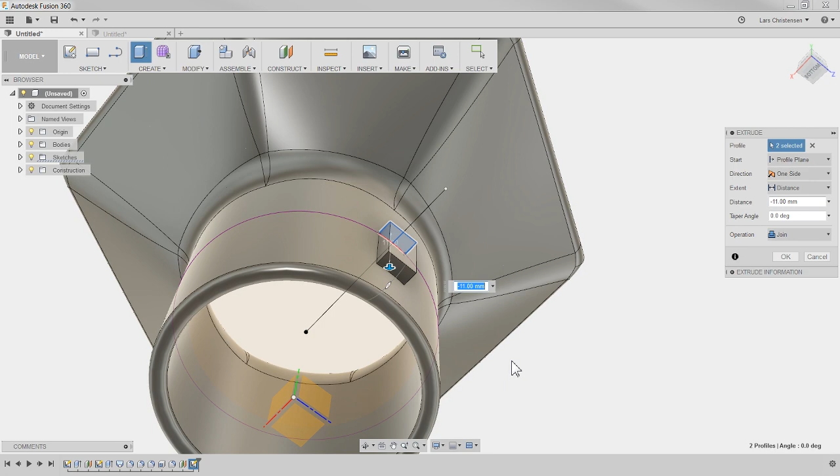Now let's hit Q for press pull. Select the 2 halves, and if I move this way, you will see that now it becomes a solid. I picked up my 3D mouse that is attached, and it messed up my orientation. So I'm sketching on that 20 millimeters.

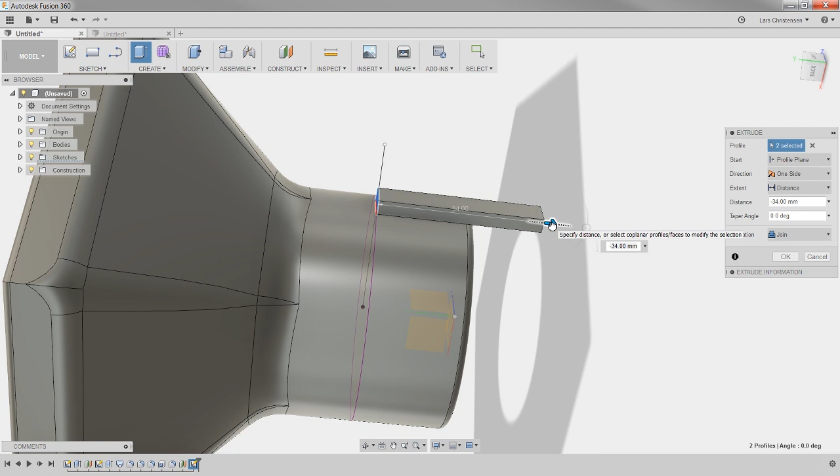You see how it changes to red? That means it's going to be a cut. I wanted to go up here. By default it's a distance, so it will just go however long we want. We can go over here and say instead of distance, up to an object, and we can select a face, and it will actually be smart enough to move it up and match it to that face there. Hit OK. So that's how we can create one of those.

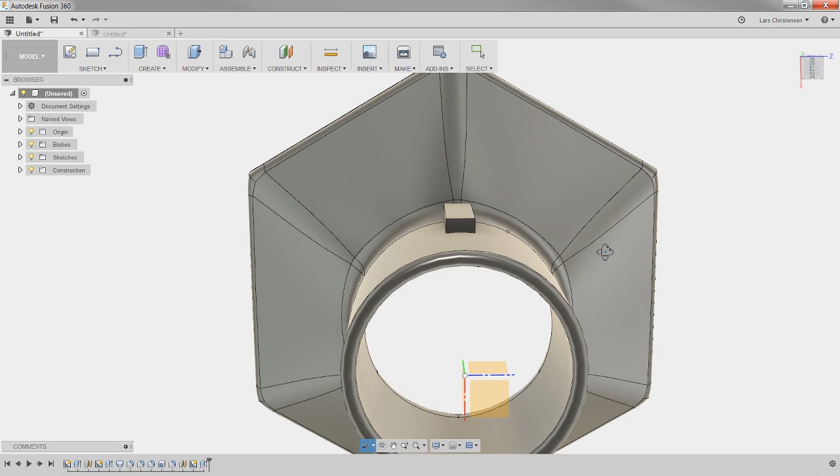Now I actually want 3 of them, so I want 2 more. I could sketch them up, or you could go to the create drop down, click pattern, and a circular pattern will take this one. I'm going to select the faces of our part here, like that. See over here, the 4 selected. It's looking for an axis to rotate it around. I'm going to select the green axis because I want it through the center of the cylinder here.

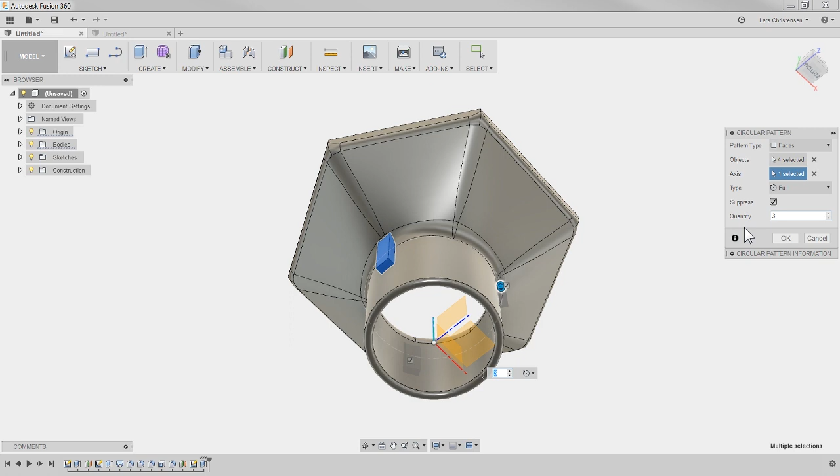And by default, it gives you 3. It's just my luck that that's what we want. Hit OK, and we now just got the other ones placed here.

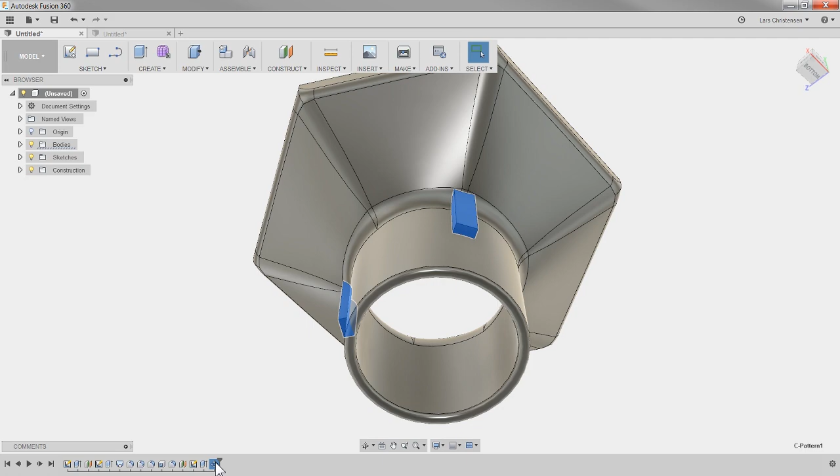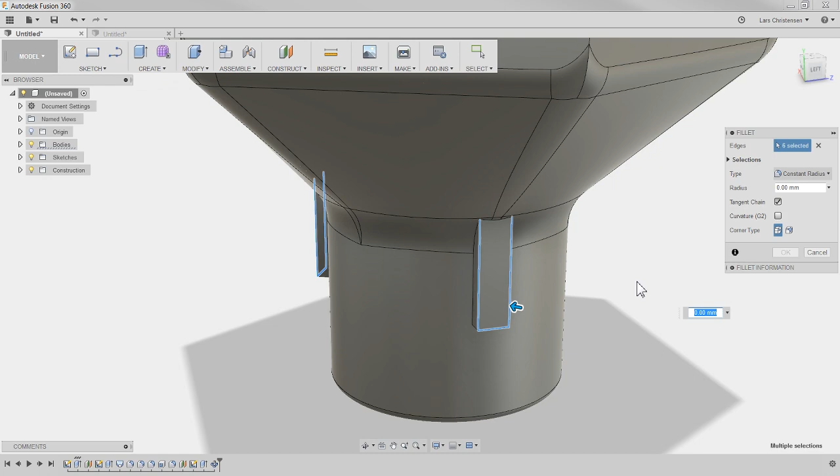Right, if we selected these here, and I don't know how big we want to make them, maybe 1. Gives us a nice little radius on that. And they're a little bit bigger than we have them on the model.

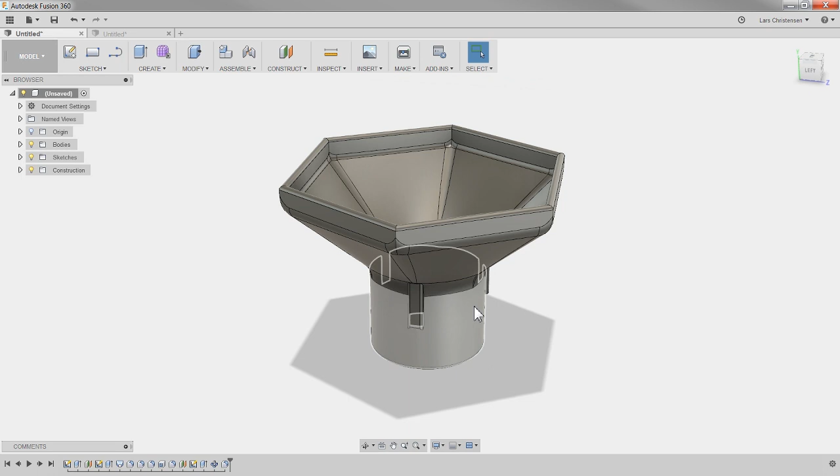But the last thing I'm going to do to this part here is I'm going to change the appearance of it. So I'm going to right click out in space, and I'm going to go to appearances. And this is really just to make it look right. Now by default, Fusion always starts out as steel. But this is clearly plastic. I'm going to go down to plastic, and there's some different types of plastics. And you can go out and play with all these different ones. I'm going to just make it black.

Since I want the whole thing black, I'm just going to left mouse click and drag the appearance up on top of the steel. And you will now see that we kind of get this plastic funnel model up here. And I think that looks pretty decent, right? Like if you wanted to 3D print your own version of this, then you should be pretty close, I think.

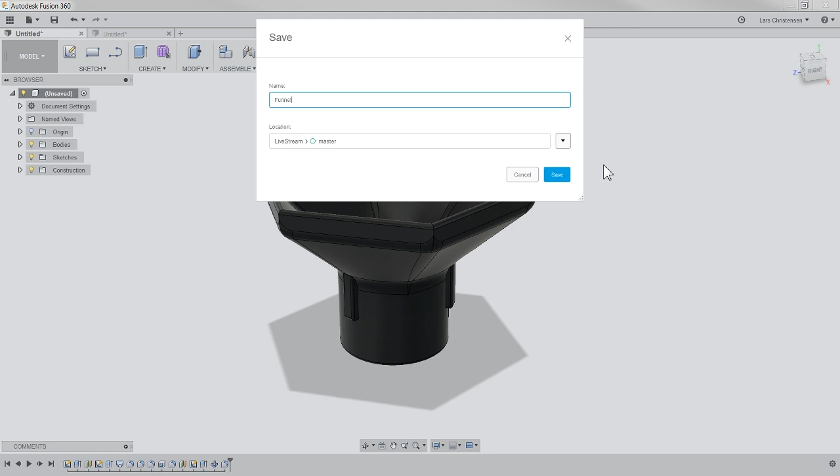Now, one thing I normally don't do in these live streams, but what I probably should have done was we should save this as we have been going along. So let's definitely make sure we save this right now. So I'm going to click the Save icon up here, the floppy disk, and you can of course choose what folder you want to leave it in, and then you should give it a name, part number, whatever you want, and hit save, and it now has been saved as a version 1 because I didn't save it prior to this. So now if you hit the little 9 squares, it will appear over here, and now it's saved.

So with that, what I'm going to try to do now, I haven't tried this before. I'm going to right click on this, and I'm going to say share public link. Let me just do that a little bit slower. This is how I share anything with anybody else. Go over here, right click, share public link. This dialog comes up. I trigger the first one, and then you will get a URL where you can download this funnel. Now you can, if you want to, put a password. If you click over here, you can put a password on it.

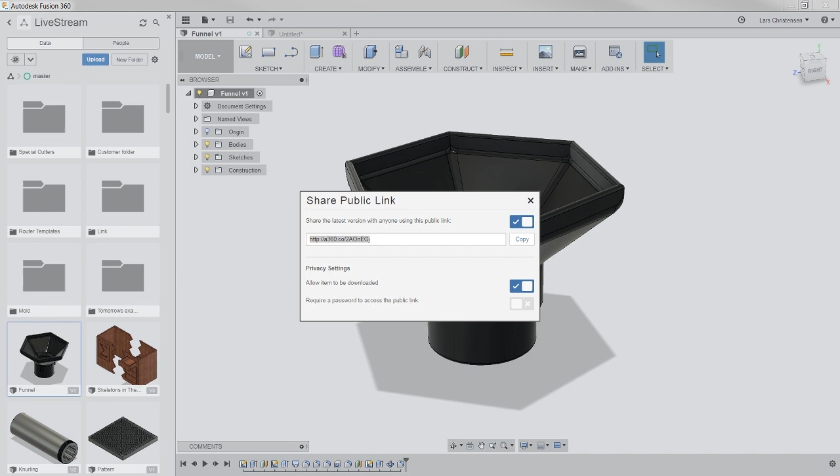Cost about $300. Yep. The smaller one is $100, and that was actually what I started out with. Back in probably like 2008, 2009 was when I used a 3D mouse the first time. And the reason I started using it was because I actually started feeling the clicking with my mouse after a long day at work. And I went out and bought the $100 version, and that was kind of what sold me from that point on.

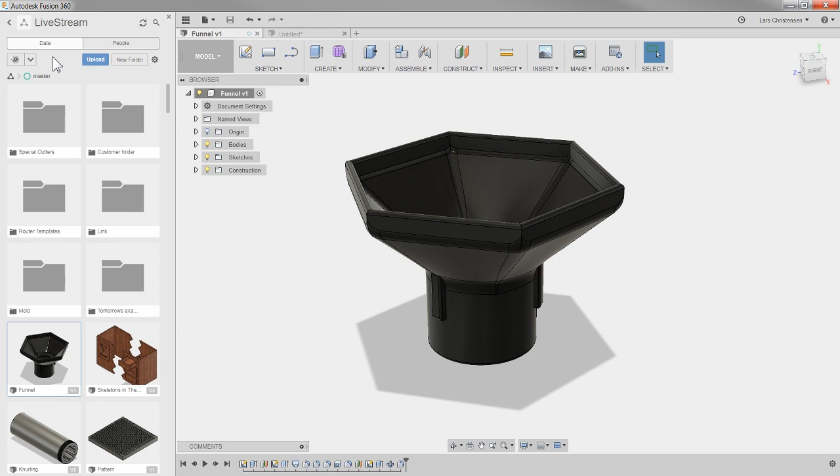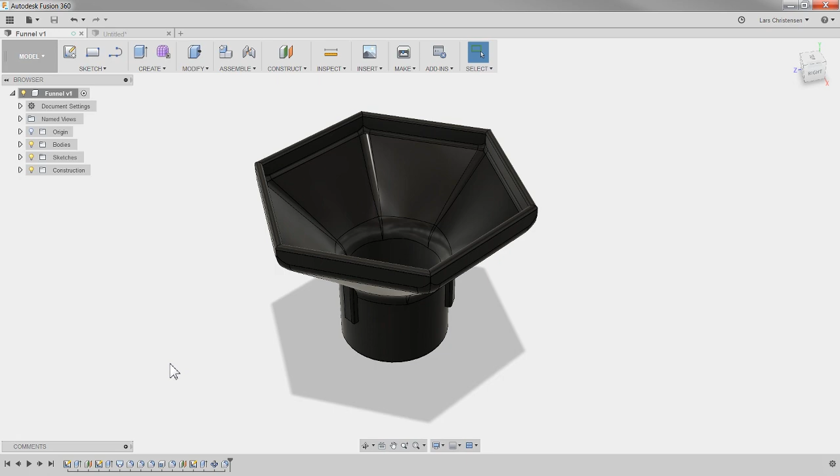All right, Danielle, I hope I'm pronouncing your name right. Was wondering if you've ever done a tutorial on drawing a Y-pipe, like an intake tube. I haven't done a Y. It's not a U, it's a Y. Sorry, I need another beer. A Y shape. I did do a live stream on piping where you could kind of use that technique. So if you go to YouTube and search piping, or I would think you would search tubing, then you will find it.